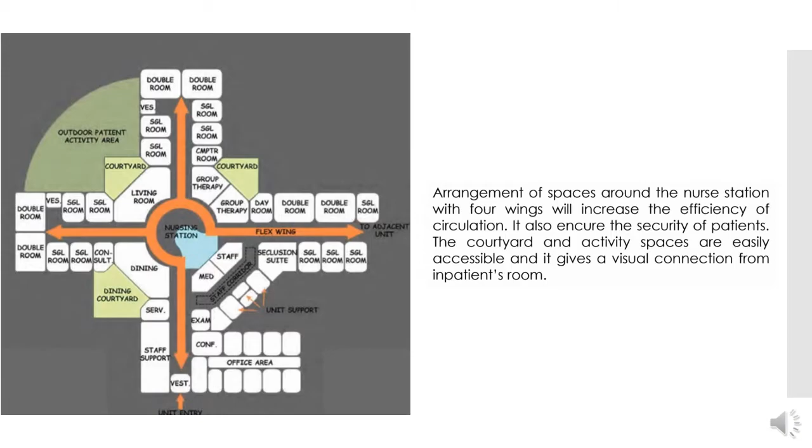I have done a live case study of Center for Harmonious Living, Kuttipuram, and Nimhans, and a literature case study of Oolampara Mental Hospital and Vejle Psychiatric Hospital.

Center for Harmonious Living is an excellent project and it is trying to deinstitutionalize the mental asylum methods and procedures, incorporating many social activities for the betterment of inmates. Nimhans is one of the best mental institutes in India and has all the modern facilities. This case study helps to understand the basic requirements for a mental hospital and also the spatial relationships.

These are the inferences from all four case studies. I mainly concentrated on the spatial planning and the form of the building, understood and compared the form of the building in each case study, and understood how they provide security and safety in all the buildings. Also looked into the materials and how they influence the mental characteristics of the patients.

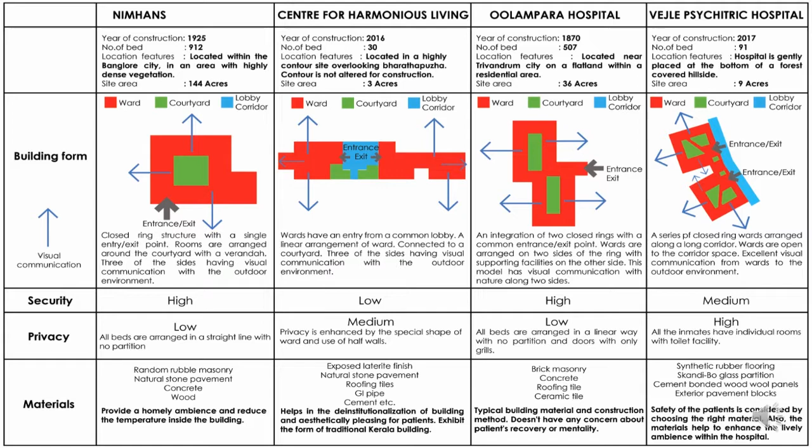The site is located in Kollamkav, Nedumangad in Trivandrum district, and it is a 27-acre land. It was used as a rubber plantation earlier and is now abandoned land. The site is highly contoured, with a level difference of around 16 meters from the road level to the top. The site has mainly two wind directions: the major wind from southwest to northeast, and the minor local wind towards the north direction.

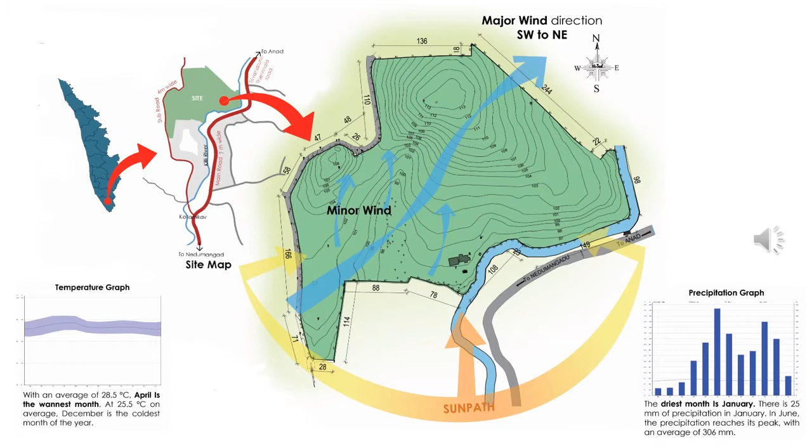The site is well accessible, with a state highway on one side and a sub road on the other side.

Coming to the SWOT analysis, the strength of the site is that since it is located in a suburban area, it provides a calm and natural atmosphere best suited for a mental health center, and is also easily accessible from major cities. The consistent wind on the elevated site can be utilized for providing natural ventilation comfort within the building.

The weakness is that the site has very little vegetation, with only one portion covered with small shrubs and small trees.

The threat is that since the site is a high contour area, the planning and construction will be difficult. Also, there's a river flowing along the periphery of the site, so construction may impact the river, so we have to design the drainage pipes, etc., according to the river.

The opportunities are the presence of two roads around the site, which can be utilized for better circulation planning. Also, there are different services, like three wells on the site and a transformer at the periphery of the site, which can be utilized for the service planning of the hospital.

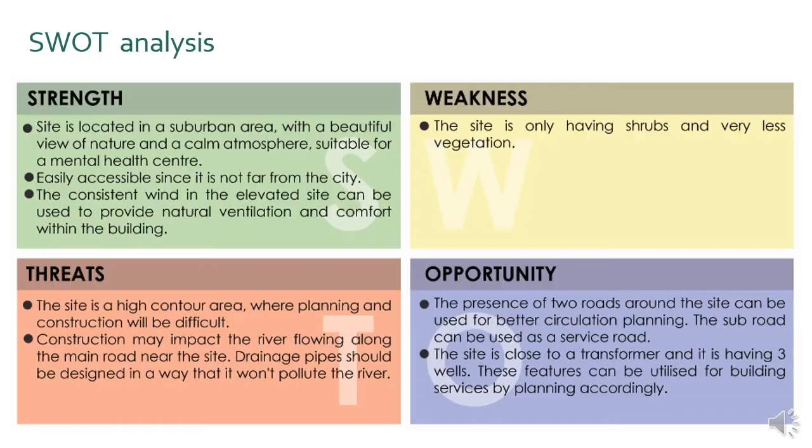In section AA, there is a gradual slope with a level difference of 16 meters, and in section BB, there is an irregular slope with a difference of 6 meters.

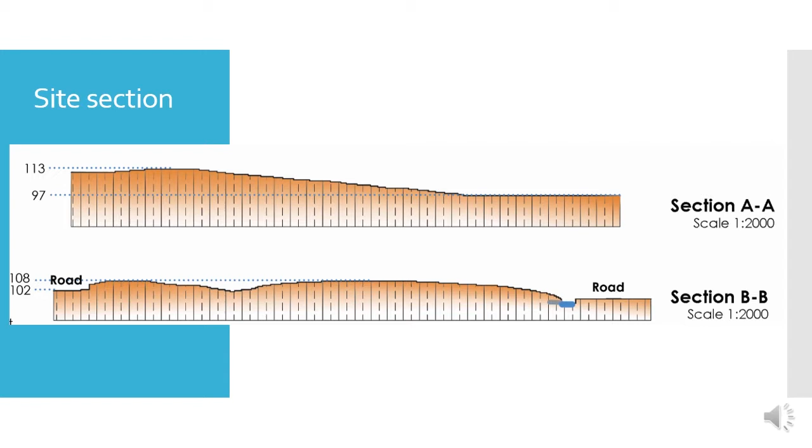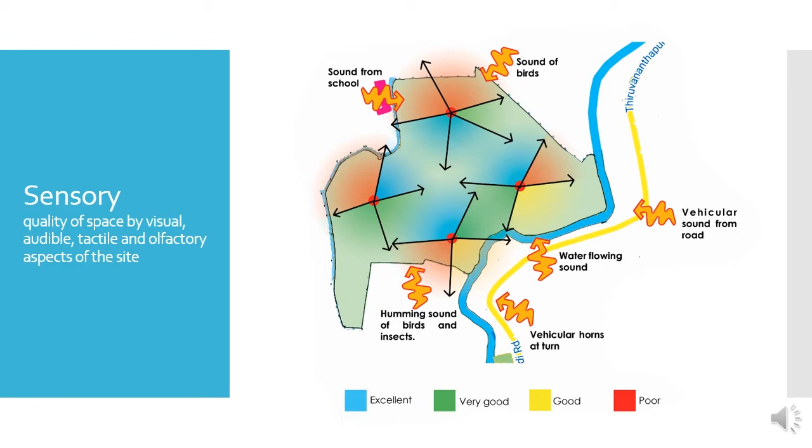This is a diagram showing the sensory analysis of the site, which understands the quality of space by visual, audible, tactile and olfactory aspects of the site, and it is found that the center portion of the site is excellent in all these characteristics. The grid analysis is done based on slope, noise, vegetation, view from the site, privacy and accessibility, and it is found that the center portion and the northeast portion of the site are having the best quality in terms of all these factors.

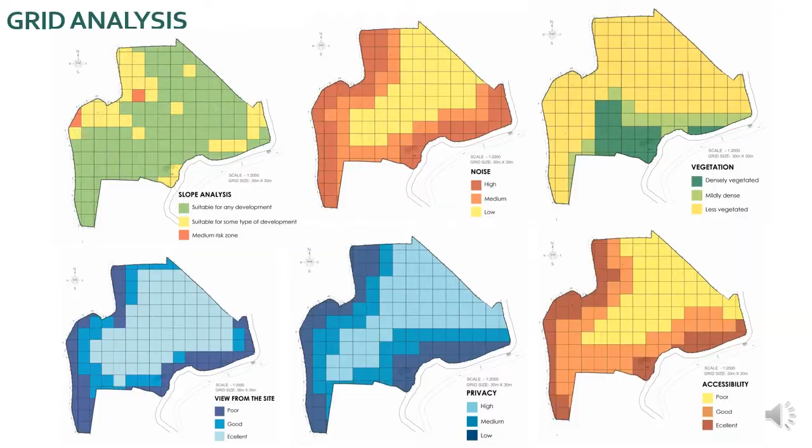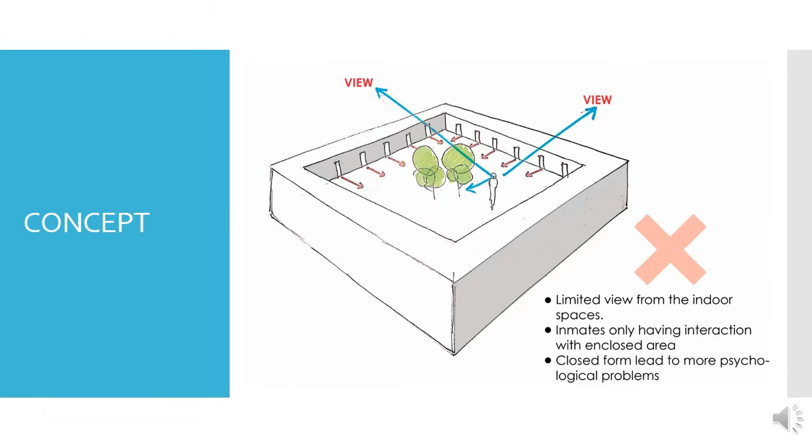Hence, I updated this structure. Since the ring structure is the most secure one, I broke the ring structure and placed it according to the contour, so that it does not compromise on the security of the space, but it will be open to one side of the site.

So it will provide a great view into the scenic mountains in the nearby locations, and it eliminates the closed form. They will have more interaction with the outdoor areas, and we can create more interesting recreation space within the building.

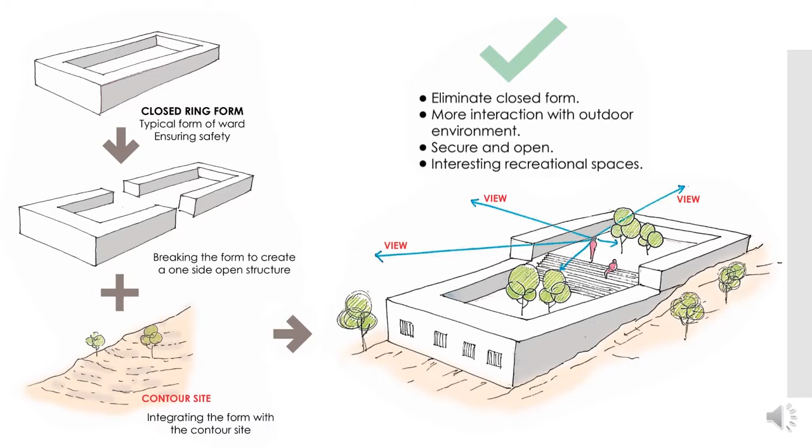The red area is the public area with less contour in it. It is readily accessible from the main road, and the main entrance is located on the south side, chosen because there is a buffer space between the river and road before entering the site, which can be utilized to control the traffic coming into the site.

The violet area is the parking area, which is a nearly flat area with an odd shape, so it is best to avoid buildings there, and since it is closest to the public area, it can be used as the parking space.

The green area is the inpatient ward area. According to my concept, I will be able to arrange these ward blocks on that contour space, so I chose that space as the private space, and close to that there's a blue area which is space for cottages.

Cottages need to be in a highly private area also, since this portion is at a higher level. I can have a proper arrangement of cottages on the top of that area, and the yellow area is the service area.

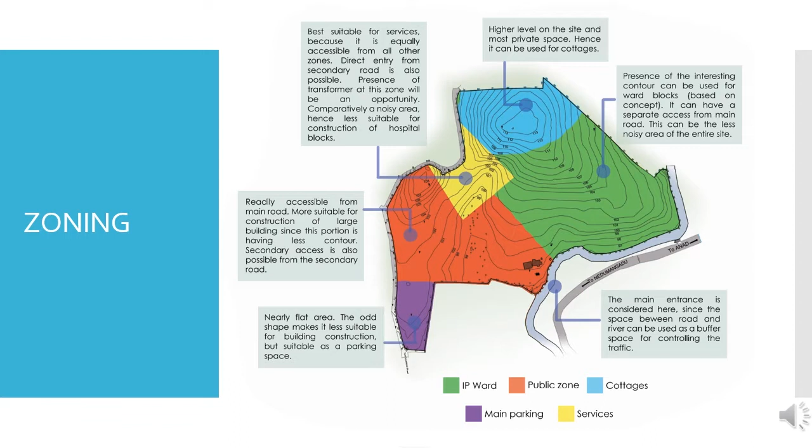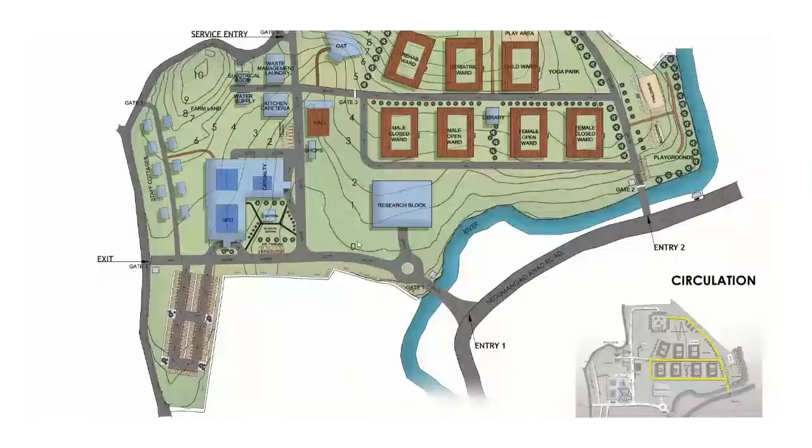The site has two main entries: one into the public zone, and another into the private zone. There is also a dedicated exit space near the parking slot, an entrance space for staff as gate 5, and gate 6 is the service entry into the site.

After entering the site, we'll have a roundabout which directs us into the hospital as well as the research block. In the hospital, initially we enter a buffer space with a canteen and outdoor sitting space. From there we'll have two entrances: one OPD entrance here and another casualty entrance here.

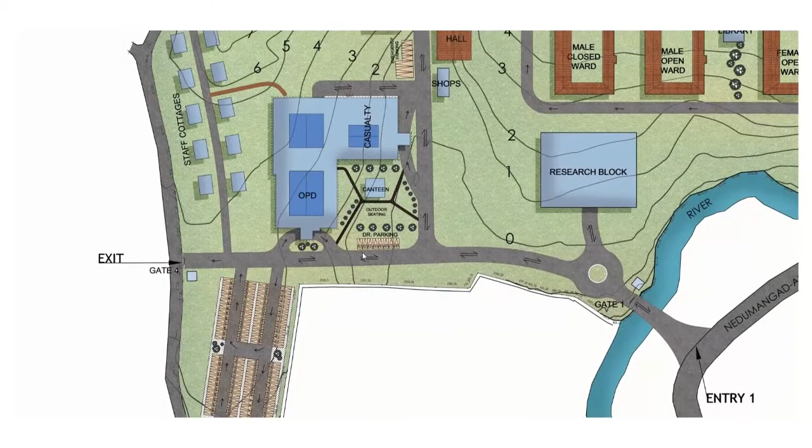Patients and families can have their vehicles parked in this parking area, which has around 100 car parking spaces. Doctors can have a parking space here near the OPD entrance. For casualty, after dropping patients at this entrance, we can have ambulance parking or emergency parking in this area.

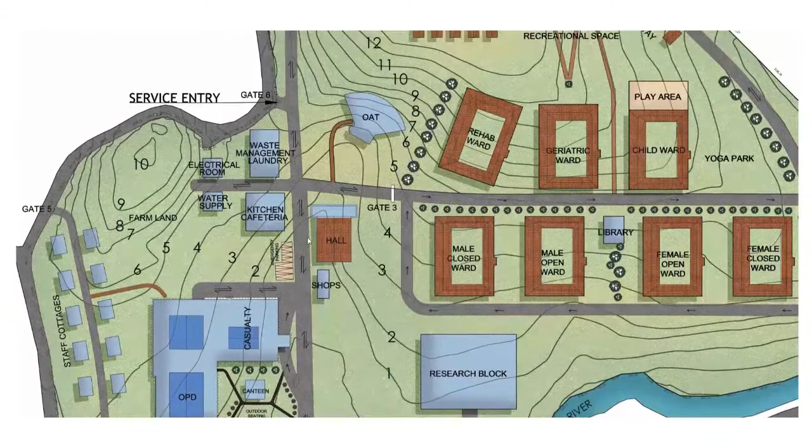This road leads to the IP department, the inpatient department. The inpatient department has a separate entry here, with gate 2 controlling people entering into this inpatient area. There's also gate 3 on this side, which blocks the public from entering into this private area. So this is mostly secured as a private area with very less vehicular movement.

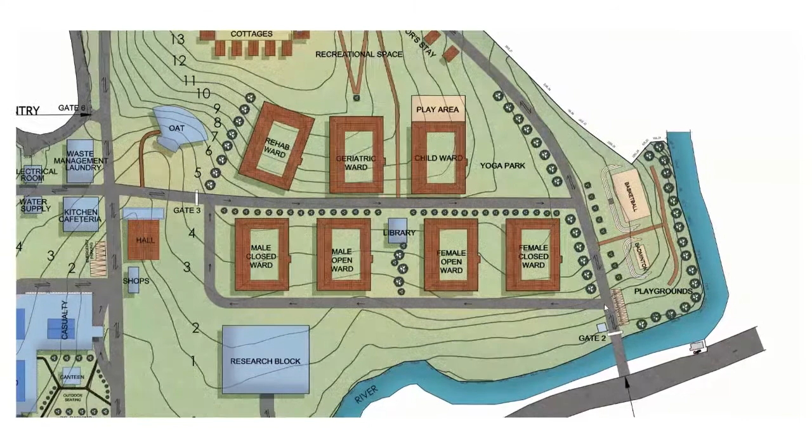Immediately after entering into the private zone, there is a parking space here, so bystanders and family can park and visit their inmates in all these wards.

There are two parallel roads on the site which lead to each ward. There are a total of 7 wards, namely male closed ward, male open ward, female open ward, female closed ward, child ward, geriatric ward, and rehabilitation ward.

There's a library in between the space at the center of all these wards, so it is equally accessible from everyone. This is also used to separate the male ward and female ward.

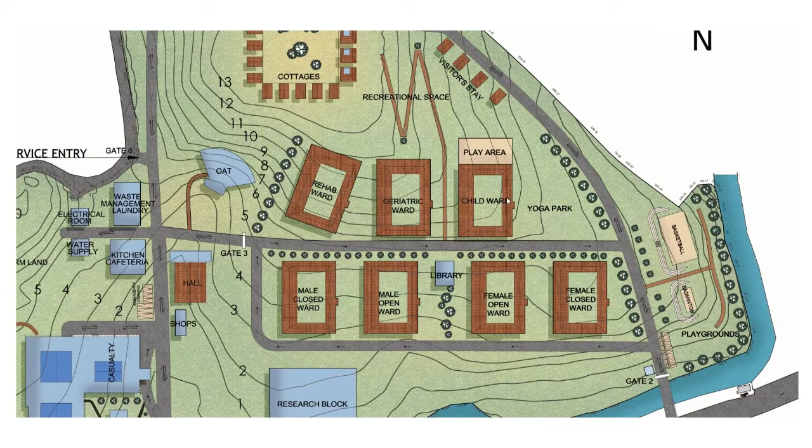There's a yoga park here, a recreation space on the top, accessible by this pedestrian path. On the other side there's a basketball court and badminton court, basically a sports area and recreation space, also connected with the pedestrian path.

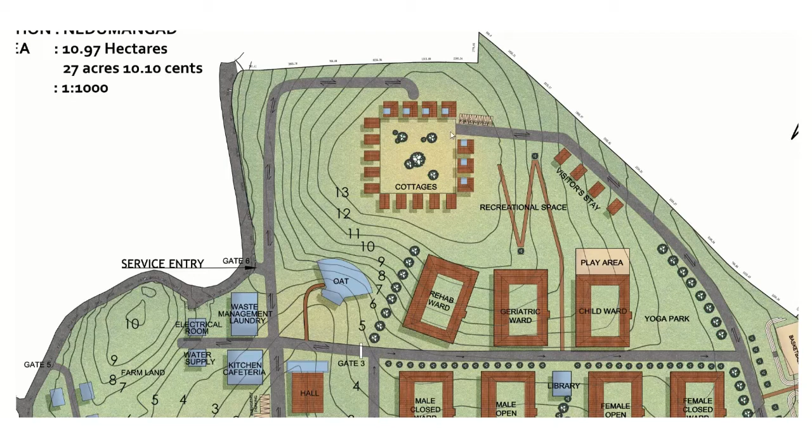This road leads to the cottage space, which is on the top level of the site. The cottage space is basically a large courtyard space with an arrangement of class 1 and class 2 cottages around it. There's also a visitor stay facility near the road itself, and car parking space near the cottages.

The ward is designed as a 2-level building, so it can perfectly fit into these contours with a 3-meter difference. Behind this, the rehabilitation ward will have a 5-meter difference from the floor level to the level where the cottage is planned. So these can actually be used as a retaining wall which secures this entire space and the inmate space from the public.

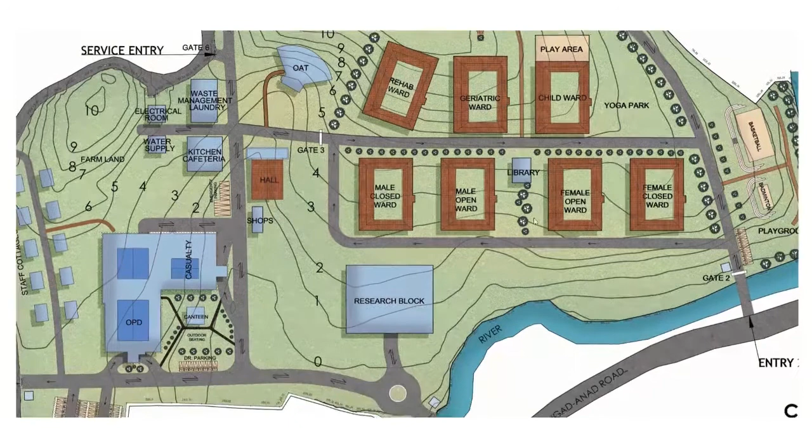Coming to the public space, we have an OAT, a multipurpose hall, a couple of shops, and a large cafeteria here.

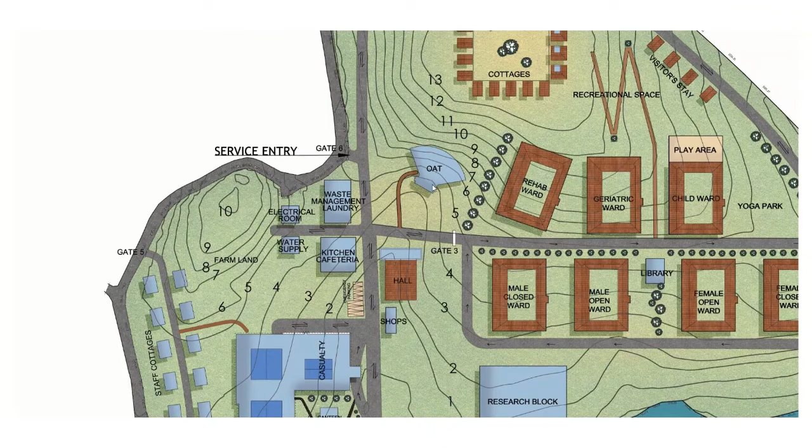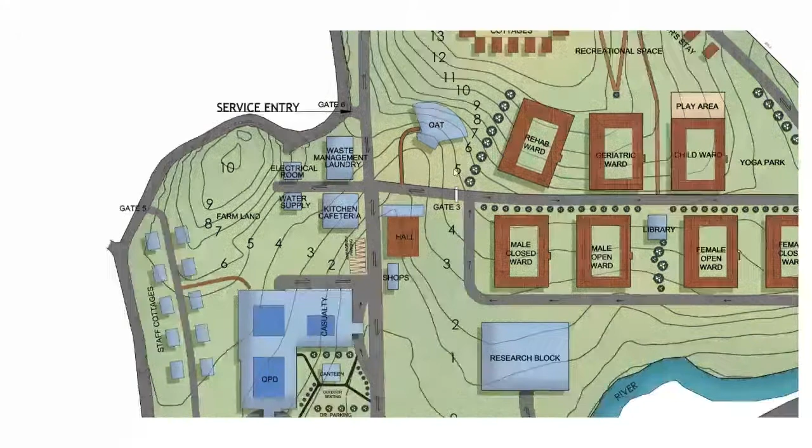The OAT is positioned here since it faces the northeast wind, so acoustically and for the comfort of people in the OAT, this is a perfect location for such a structure. The hall is placed in this public area as a multi-purpose hall, which can be used as an exhibition hall, an event hall, or a training classroom, etc.

There are shops nearby used for selling products made by the inmates in this rehabilitation ward. In this service core we'll have a waste management and laundry building, and a water supply building and electrical room here. This road leads to the farmland, used by the rehabilitation ward inmates for farm work.

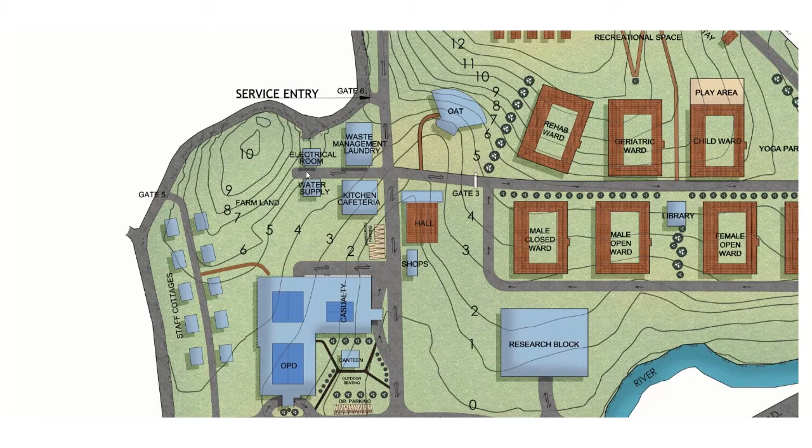Near the OPD, there's a space for staff cottages, and they'll have direct entrance from the staff cottage area into this hospital building, on the back side of the building.

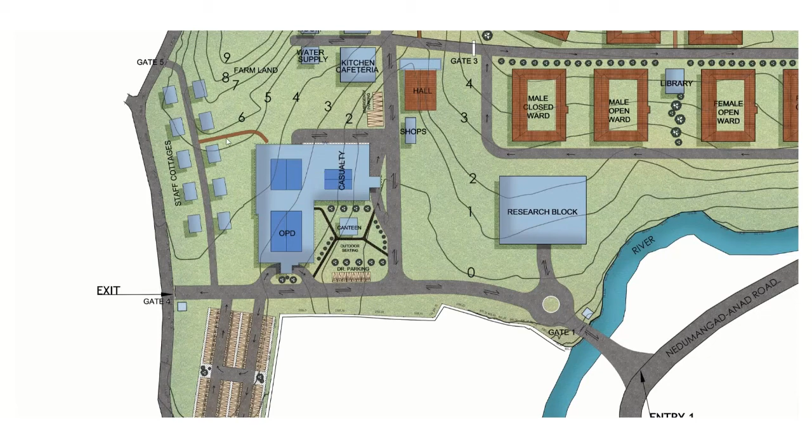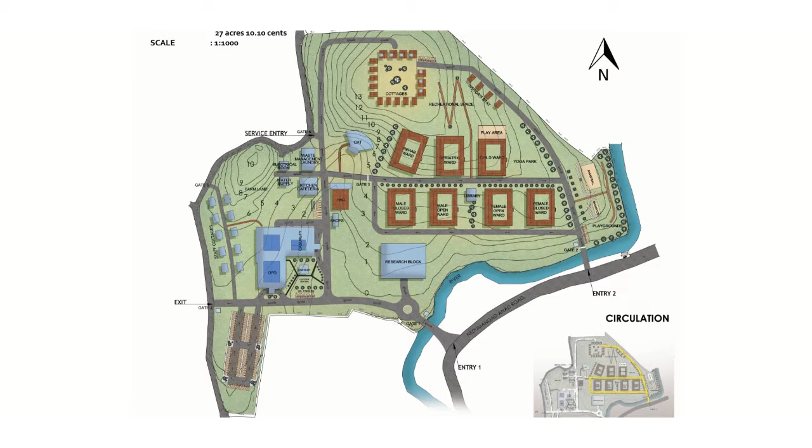Basically, the left portion of the site is a public space with more public activities, more noise, all the hospital activities, and more vehicular movement. On the right side of the site, it is a quieter place with less public accessibility and less vehicular movement, which will support the healing process of the inmates.

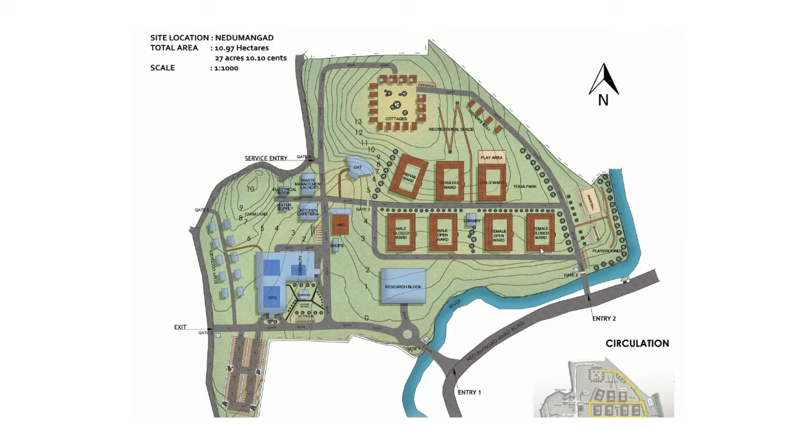This shows the circulation path of different user groups.

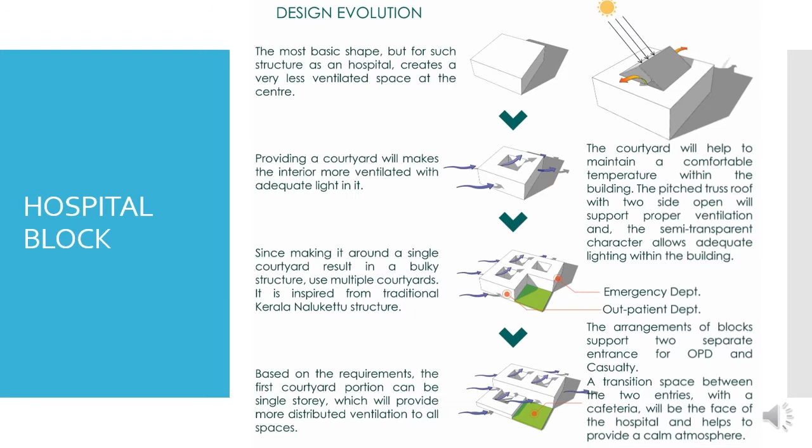The basement floor includes a CSSD, laundry, and electrical room, connected to the upper floors by a stair and a service lift, and also connected to the site level by a ramp.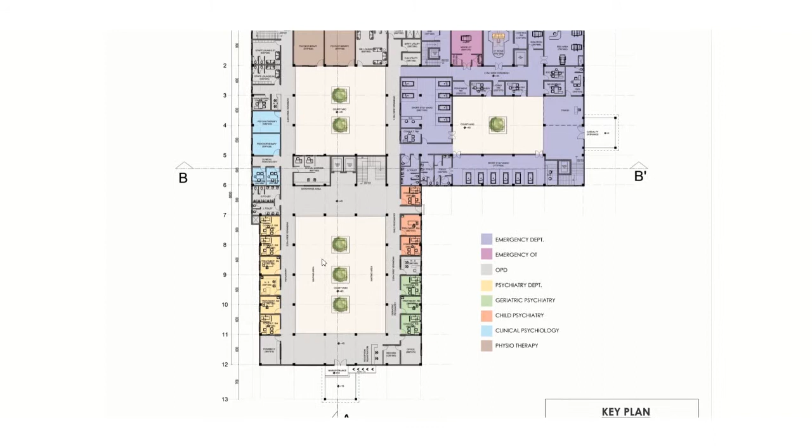There's an entrance into the OPD from the south side where the most activity is located, and from here we'll be entering the entrance courtyard of this building. This courtyard is used as the waiting area, with small vegetation placed in it to create a green atmosphere within the building.

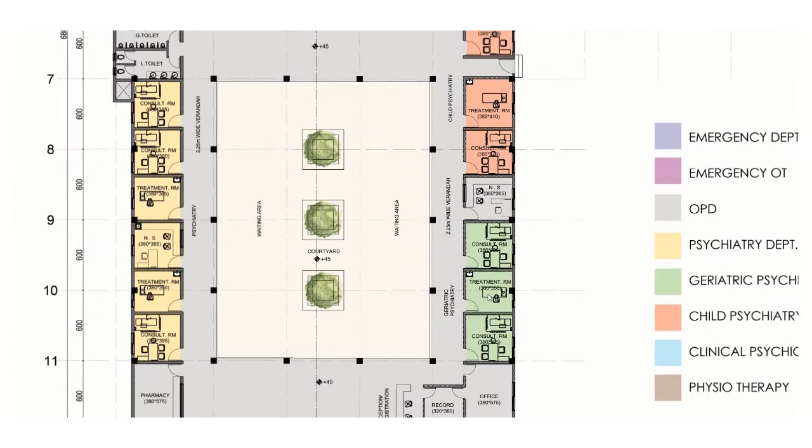In this courtyard we'll have different departments: a psychiatry department on the left side, and on the right side a geriatric psychiatry department and child psychiatry department. Each department includes a consultation room and a treatment room, facilitated within a nurse station which can control the child ward, psychiatry ward, and geriatric ward.

Here is the main vertical transportation core. There are 2 lifts here, 2 bed lifts here, and 1 staircase.

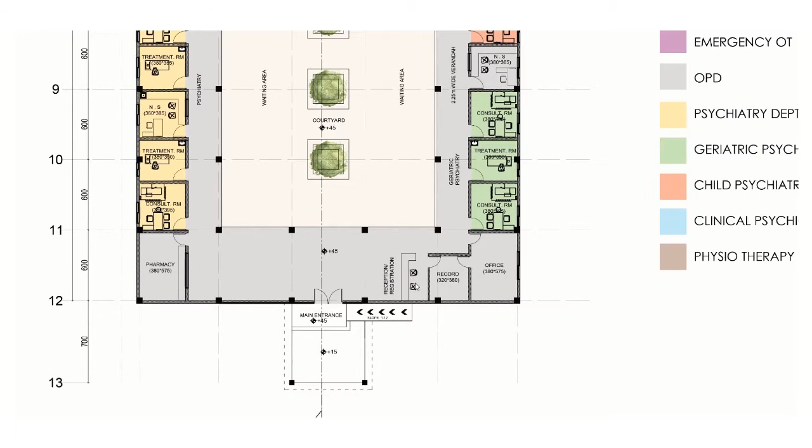After entering the building, patients will register at this registration desk. Behind it there's a record room and office space. After registering here, they will wait for consultation.

And there's also a discharge area here, which is run by the social workers. And on this area we will be having a gents toilet and female ladies toilet here.

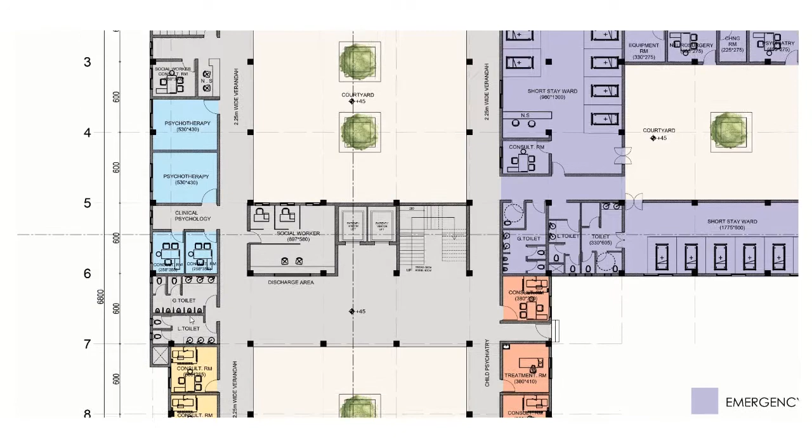Coming to the other courtyard, the second courtyard has the clinical psychology department in blue, and this brown color is the physiotherapy room.

Adjacent to that there's a doctor's lounge, and on the left side there's a staff lounge.

This physiotherapy room is placed here because the people coming to these physiotherapy rooms will be having some physical challenges, so it is best to provide these facilities on the ground floor so that they don't have to access the lift or stair.

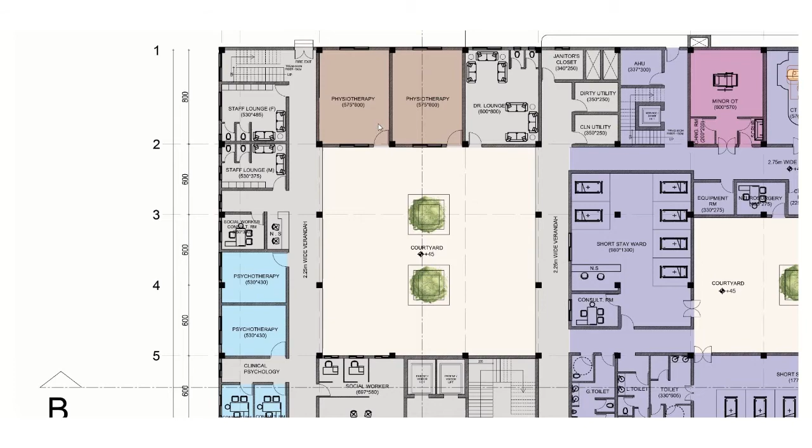There's a psychotherapy room area with two psychotherapy consultation rooms.

Coming to the other right side, this is the emergency department. So the casualty entrance is here.

After entering into the casualty, there's a triage space here, which will be run by the social workers and the CMO as chief. These people will decide the patient situation, whether they need to go to the neurosurgery consultation, psychiatry consultation, or neurology consultation.

So there's three consultation rooms here. After consulting them, they'll be directed into the short stay wards.

There's two short stay wards, namely the yellow ward and green ward, and there's also a red area here at this top right corner.

And nearby that there's an isolation ward also.

Here we will be having an entrance into a 2.75 wide verandah which leads to a minor OT and a CT scan space. For emergency purposes we'll be having operations within this minor OT itself.

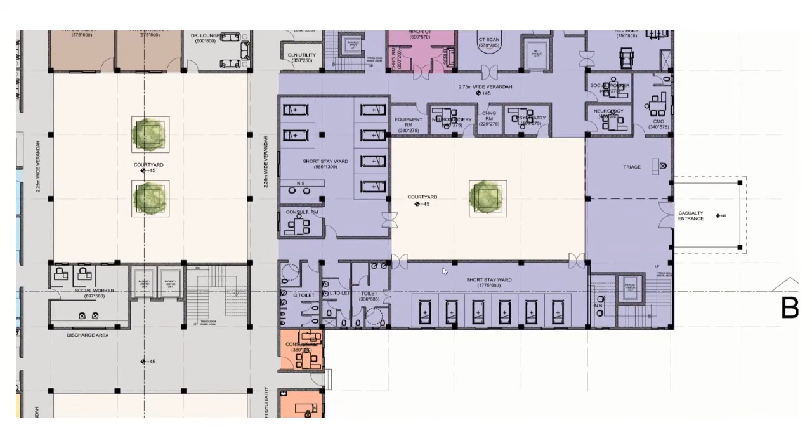Here at this core, this is a service core of the building with an AHU unit, a service lift, dirty utility and clean utility rooms, and a janitor's closet.

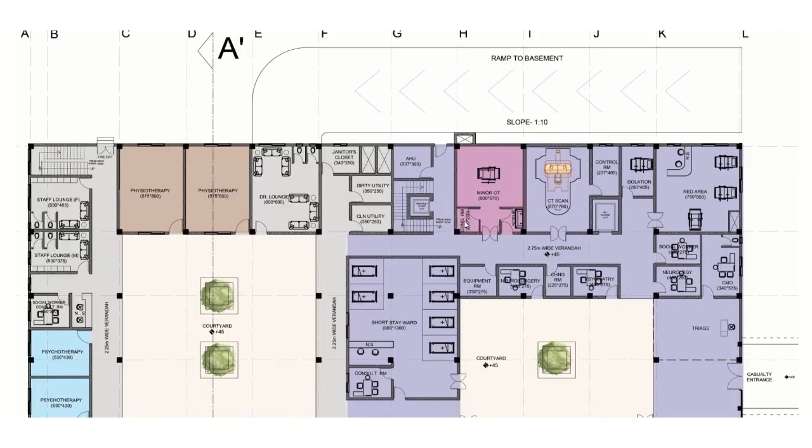This service core will be having accessibility to the two wings of these buildings, namely the OPD and the emergency department, so it is easy to manage waste material as well as the cleaning process.

In the first floor, there is an ICU and OT department on top of the casualty, and the remaining OPDs and therapy rooms on the left side.

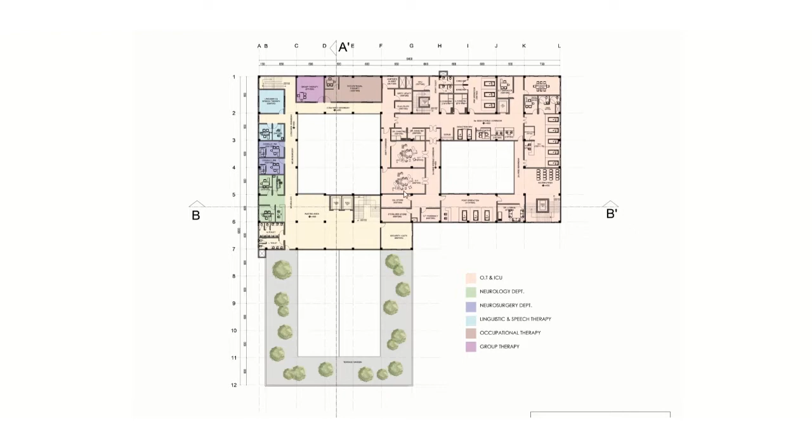Coming to this OT, the patients will enter using this doctor-patient lift here into a semi-sterile corridor. From there, patients are taken into this pre-operation room where the patients can change.

And from there patients are taken to this induction bay where they will be given the anesthesia.

Doctors can change in these doctors changing rooms, and staff can change in these staff changing rooms, and there's staff toilets behind these changing rooms.

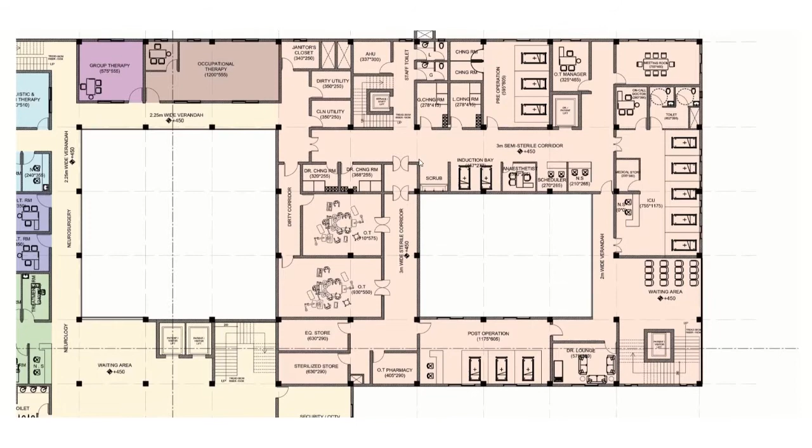After changing and using the scrub areas here, the patients and doctor will enter into this sterile corridor through this double door. So there's two OTs located here, and there's OT supporting facilities like equipment store, sterilized store, and OT pharmacy here.

Behind the OT there's a dirty corridor which leads to the dirty utility and cleaning utility space and janitor's closet, so that services can be done through this dirty corridor.

And after the operation, the patients are taken to this post-operation ward. From here, if they are better, they will be taken into this ICU on the right side.

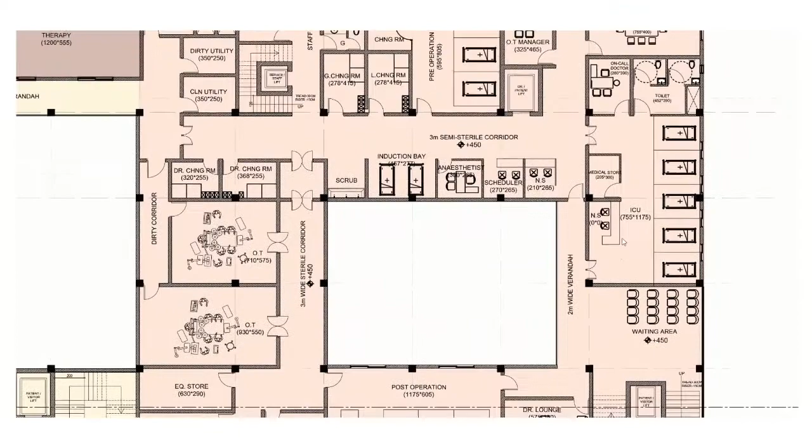And there's an OT manager's room here and a meeting room here. And the public will be having access into this space through these stairs and lift.

There's a waiting area here, so if they want to visit patients in the ICU, they can have a visit along this path. And coming to the other side...

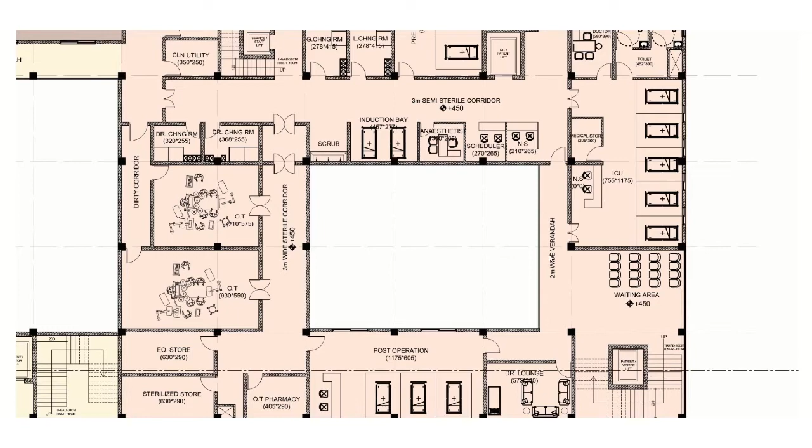After entering this lobby space, we'll be having a security CCTV space on the right side, and on the other side there is a common toilet space, and then here we will be having neurology, neurosurgery, and linguistics speech therapy consultation rooms.

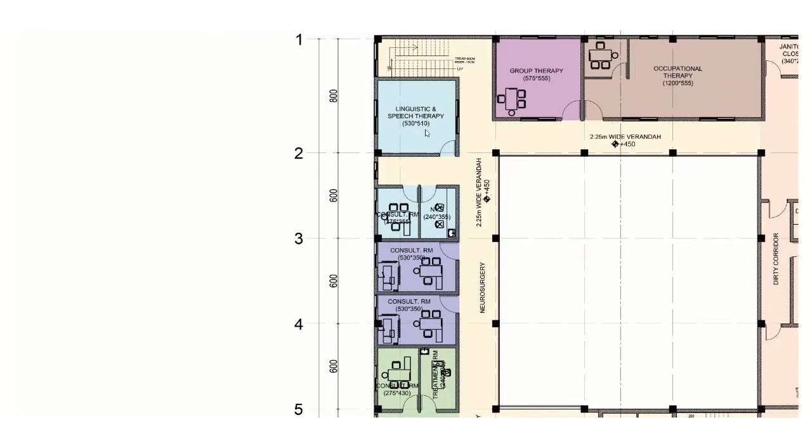Each of them occupied with a consultation room, treatment room, and a common nurse station here for this.

And the north portion has therapy rooms, namely group therapy, occupational therapy, and linguistic and speech therapy.

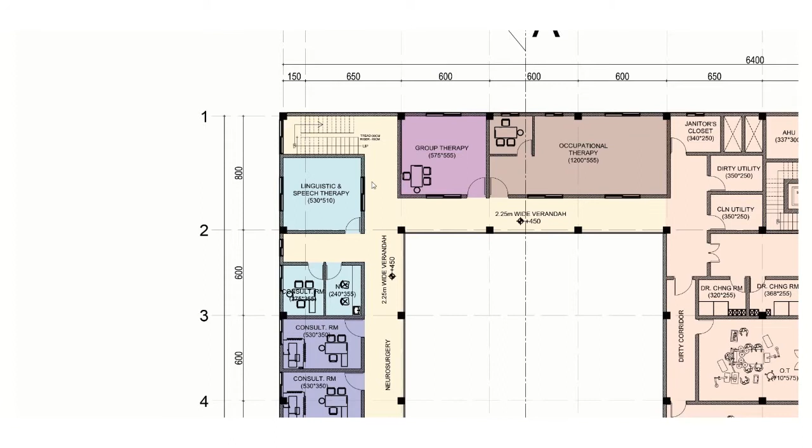The second floor includes IP wards and administration on the right side, and laboratory and therapy rooms on the left side.

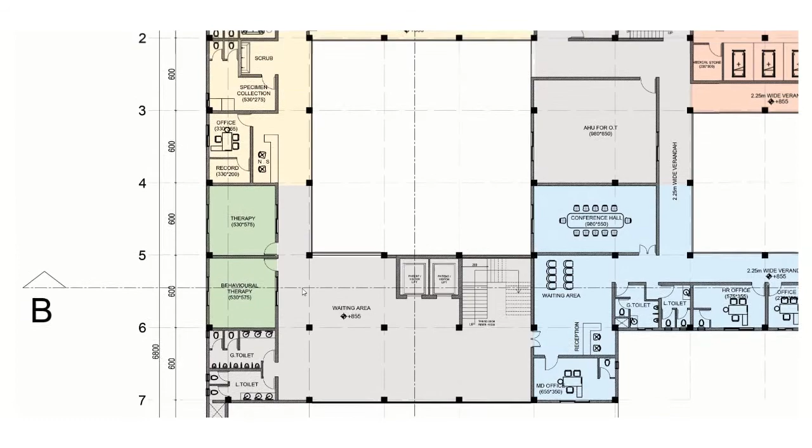As earlier, there's a waiting space here. From the waiting area, we have access to the behavioral therapy rooms, and then there's a laboratory space.

We'll be having 3 labs for blood test, urine test, etc. Here, after entering, there's a station and an office space.

From there, we'll be having a scrub space and a specimen collection space with toilet facilities. And at this corner, there's a staff lounge space.

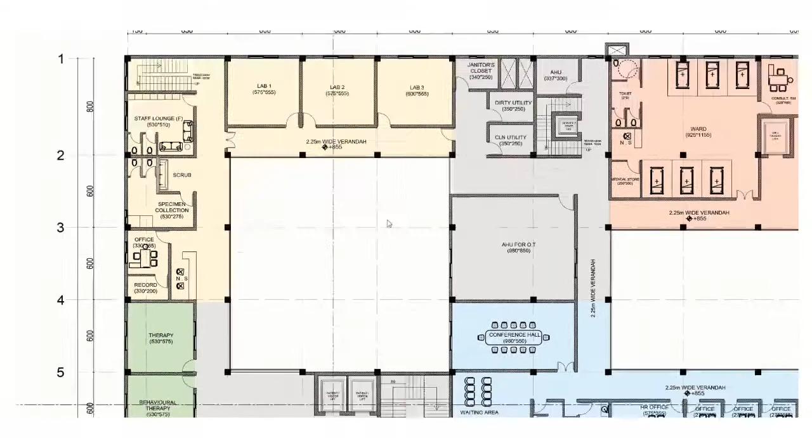And on this side, we can have an entrance into this reception space of the administration. Close to that, there's an MD's office.

And there's staff toilets here within this administration, and a conference hall here. And on this side, we have...

Offices for the staff. And on this area, there's an AHU for the OT. The AHU for the OT requires a separate AHU for sterilized air supply, so it is provided right on top of the OT space.

And on this side, we have 2 wards for people from this ICU. So there's a staff lounge space, and each ward is occupied with consultation rooms, toilet, medical store, and equipment store.

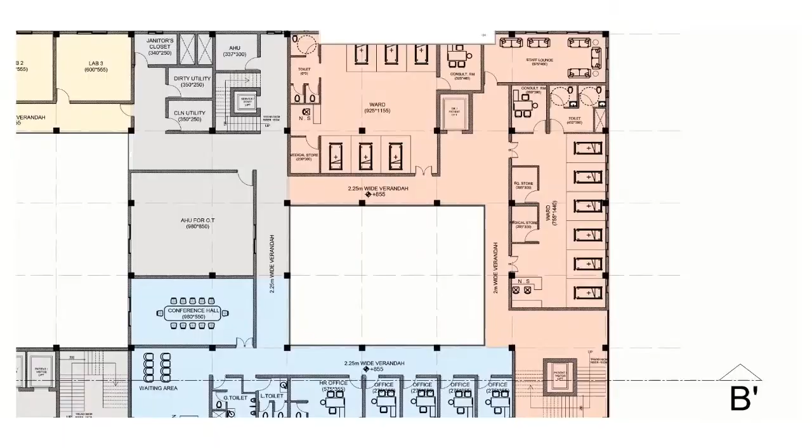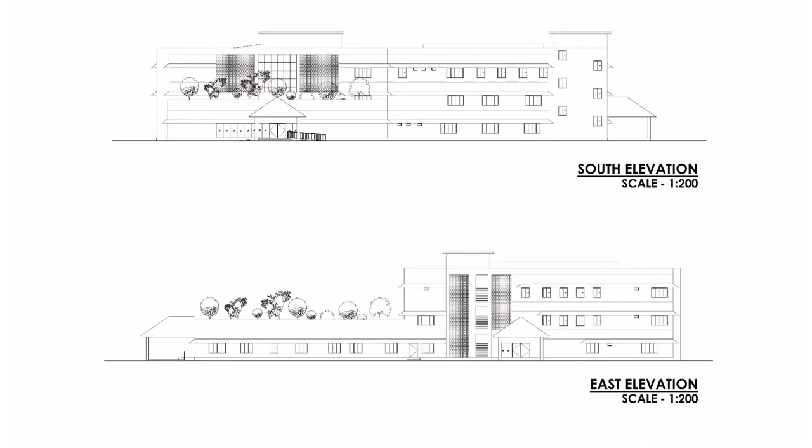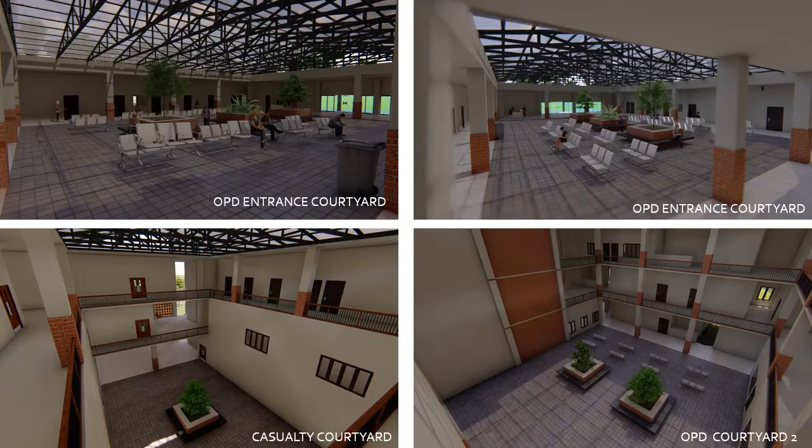The ward is designed in 2 levels, considering the contour as well as the sun path. The ground floor of the ward block includes dining space, social workers room, consultation rooms, treatment rooms, office space, staff space, and utility space. The cell and timeout room is isolated from the ward space, so that part of the ward space will be calm and quiet.

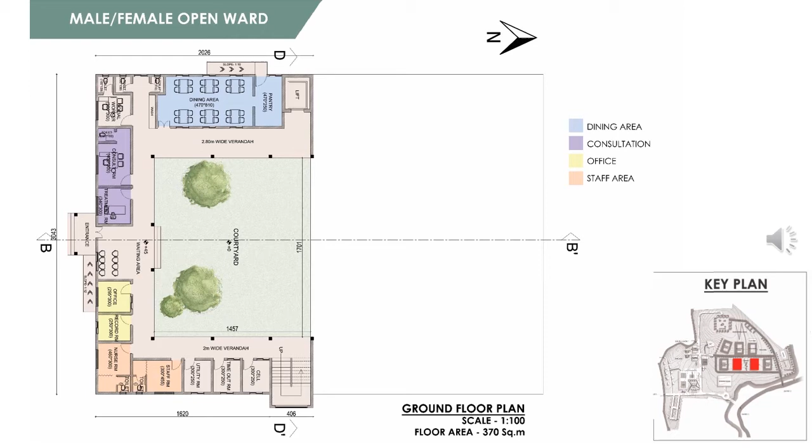The first floor includes ward and single rooms. Ward is located on the west side, and the single rooms are on the north and east side. There's a 13 capacity ward and 10 single rooms, monitored by an attenders room located near the single rooms. The single rooms have a common toilet, and the ward has a common toilet, and at the end there's an activity room and multi-purpose rooms for the inmates.

Also, they can use this courtyard as a recreation space, and these steps act as a mini OAT, which can be used as a recreation space or seating space, or they can conduct small programs here.

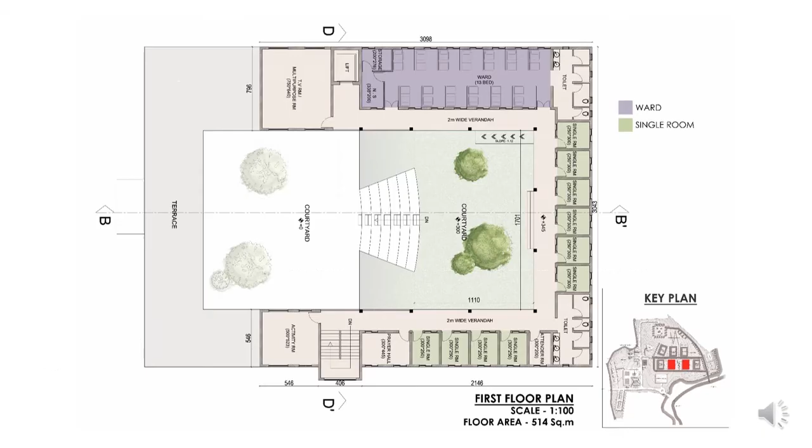For the closed ward, the planning is similar to the open ward, but with added security by providing a double door in the entrance, and since the patients in the closed ward will be more violent, they have provided 2 cells in the ground floor.

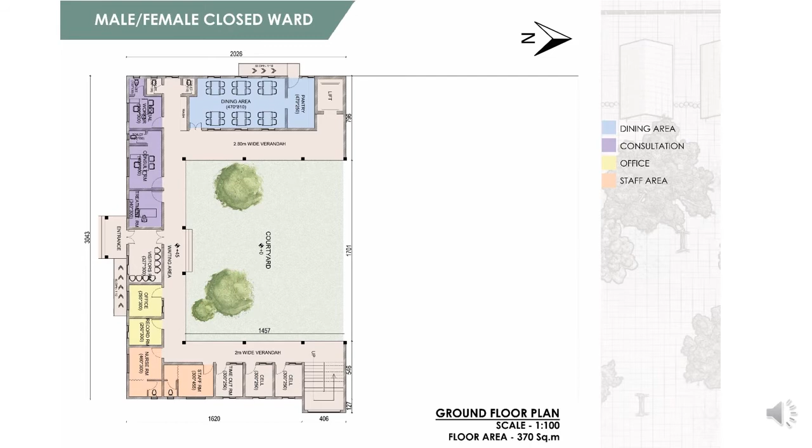In the first floor, which is also similar to the first floor of the open ward, but added a facility called forensic ward, where criminals with psychological problems are admitted. Close to this forensic ward there is an escort room for the police, with an attached toilet.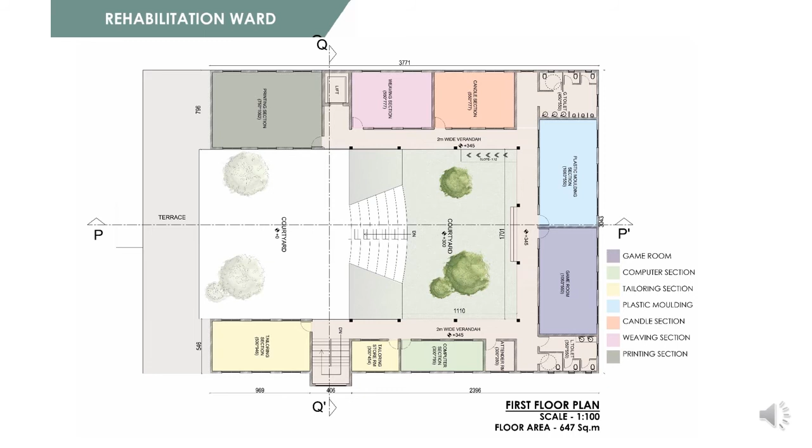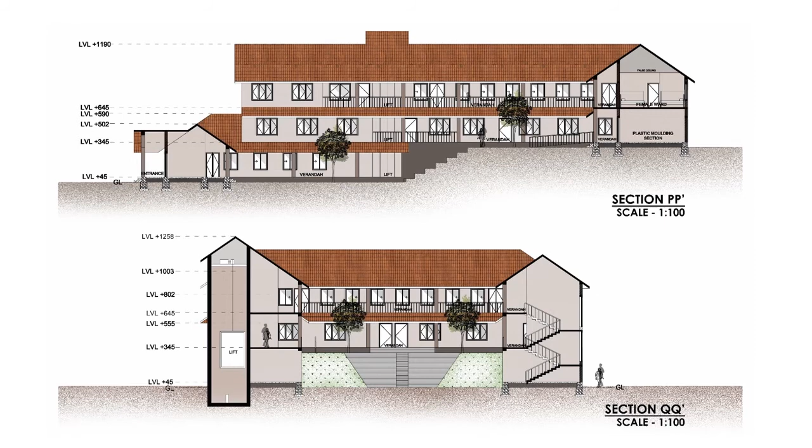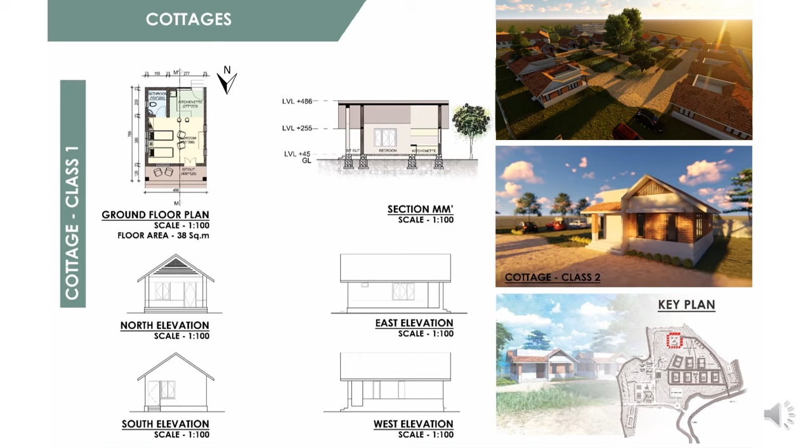There are 2 types of cottages, class 1 and class 2. The class 1 cottages have an open veranda giving access directly to a bedroom space and then to kitchen space and a toilet facility. The class 2 cottages, or the luxury unit, have a veranda open to a living room, then 2 bedrooms and a common toilet, and opening to a kitchen space.